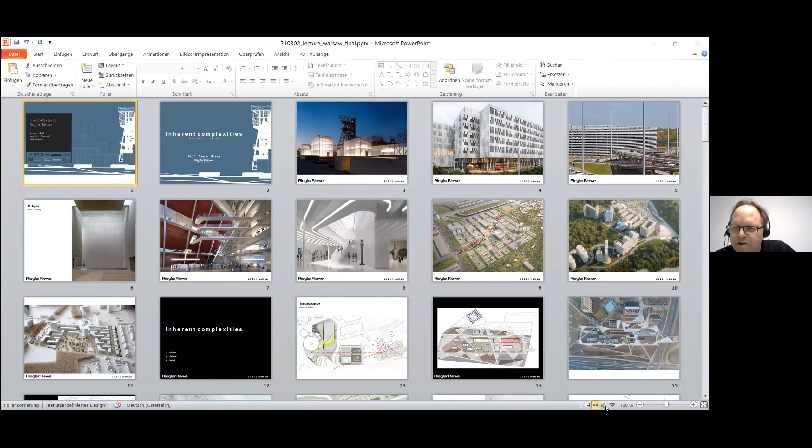Let me refer to your comment with the different hats I'm wearing. Actually, this has a certain background because due to my private situation, I got used to wearing these different hats because I'm German by birth, but I grew up in South Africa, so I'm German, South African, but also Austrian, always crossing the border. And since then, I'm always interested to see what is behind the border. So I'm never really satisfied with my situation where I am at the moment, but always, what are the others doing? What can I see? What can I learn? So different kinds of cultures, different languages.

I grew up trilingually. And with the language, you also get into the culture of other countries. You get to know how they're dealing with their everyday life. So it's always a kind of international approach, whereas I don't really put any stress on internationality because it is absolutely normal. It's just the usual way of working. So it's always the interest in the others, and also, as you said before, Victoria, of different materials, of different architectures, which arouses my curiosity. And then I try to cast this into architecture.

So with this lecture this evening, I would like to put forward a title, which is also the substantial content of this lecture, which I would call Inherent Complexities. Something which is like a bottom line in our architecture, especially if you see very different projects we've been working on, we have designed, we have done competition entries. Sometimes you might think, oh, but they look quite different. And where's the bottom line? So I would like to talk about this bottom line in terms of inherent complexities.

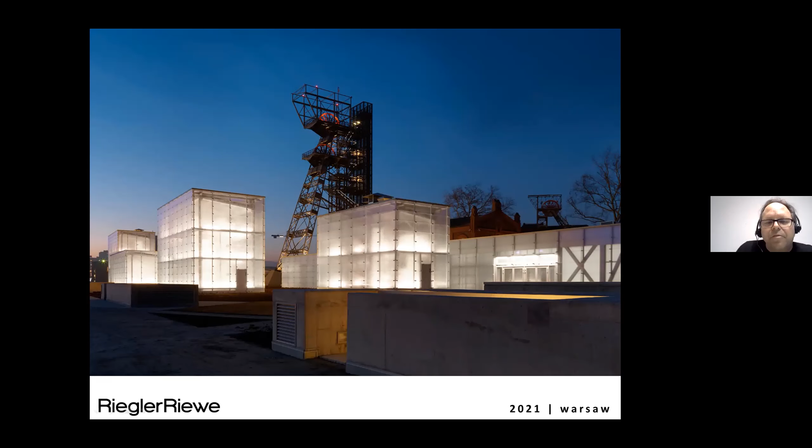So I would like to talk about a project you referred to already, which is the Silesian Museum in Katowice. A very prestigious big project, which was actually also nominated and shortlisted for the Mies van der Rohe Prize. I would like to talk about the new medical university we have designed and which is partly still under construction in Graz.

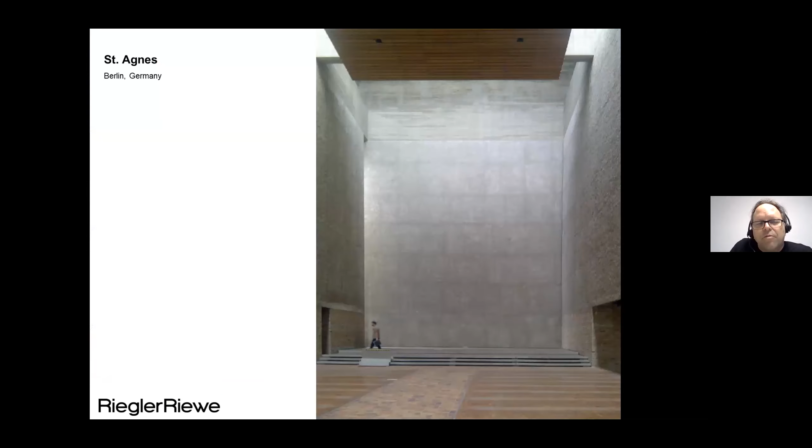I would like to talk about a huge car park for close to 3,000 cars located in the Hamburg airport area. I would like to talk to you about a gallery space or refurbishment of an existing church in Berlin, St. Agnes. I would like to talk to you about a huge event center, convention center for 20,000 people in Vienna.

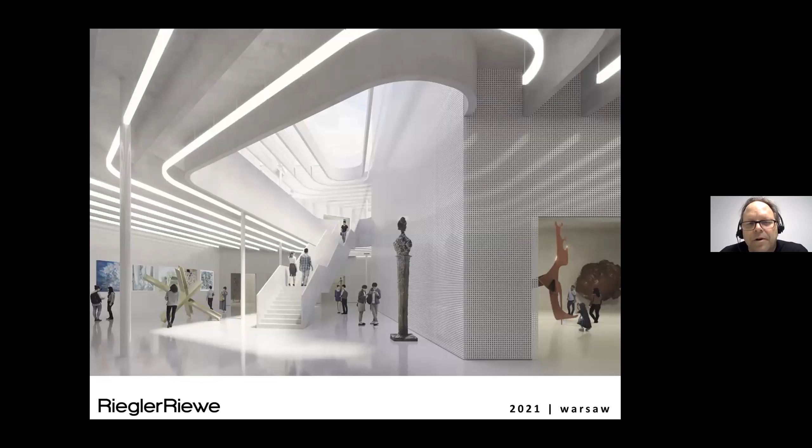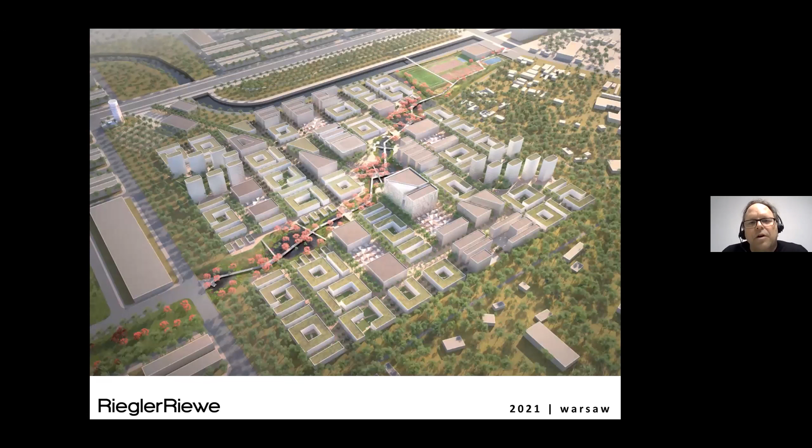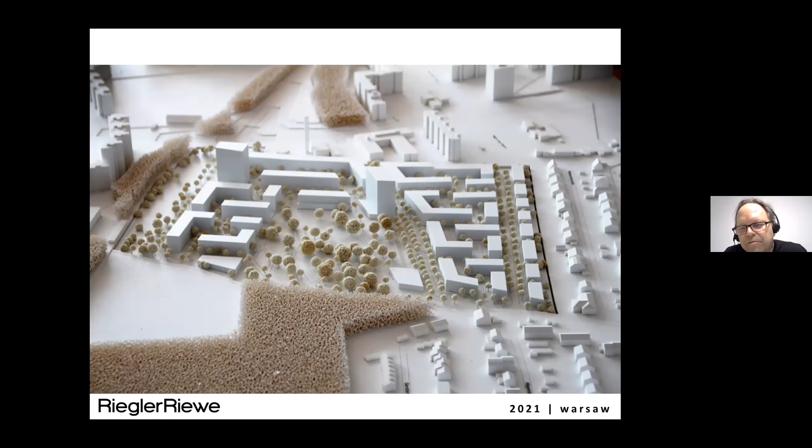I would like to show you and discuss a project in Seoul for a museum. And I would like to show you a project, the Vietnamese German University in Ho Chi Minh City, formerly Saigon, and a housing project in Seoul. And finally, also a housing project, a big urban development, which is in Germany.

Inherent complexities, something which actually goes by scale and which has different layers, but sometimes we cannot really divide these layers because everything goes like crisscross. But trying to focus on certain things, I would say there's something like an urban context, an object context, and a detail context in terms of inherent complexities.

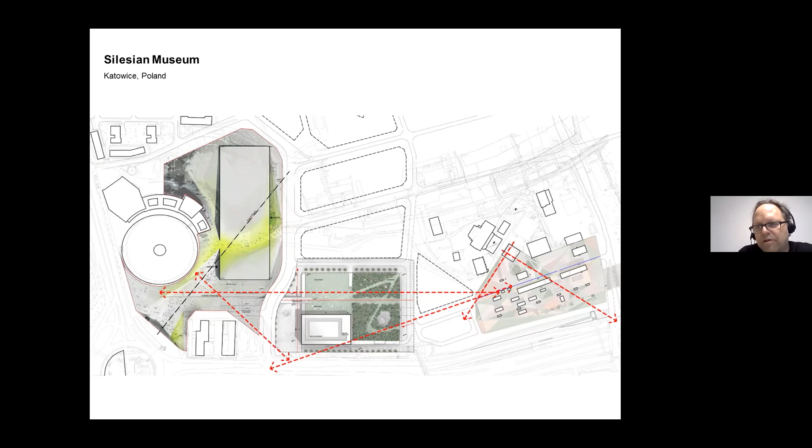So how to deal with this on a post-industrial site, which I think was highly interesting and caused our curiosity. So we said, let's give the city of Katowice not only a museum, but also public space, because we noticed this was at that time still kind of underdeveloped, and Katowice was striving to look for something new, trying to define a new center and things like that.

And so we said, okay, we'll use this possibility of connecting the park on this side with the Spodek on this side, opening it up and giving a park to the citizens of Katowice, giving them something as a present, which is unexpected, and contextualizing the museum with this site and with the urban setting.

At the same time, you notice with this idea, building a museum on the site would be counterproductive, because the museum would block off all these ideas and you could not walk from one side to the other. So we said the museum can only be something which is very small or hardly visible, something which, as we always like doing, does not look like a museum, causing some kind of irritation.

This was the design proposal, and finally in the built state, it looks just about the same. We were able to build exactly the things we were designing in the competition phase and implement them in a built, manifested way. On the right-hand side, you can see the bridge crossing the new road going into the existing park. And on the left-hand side, you continue to walk to the Spodek.

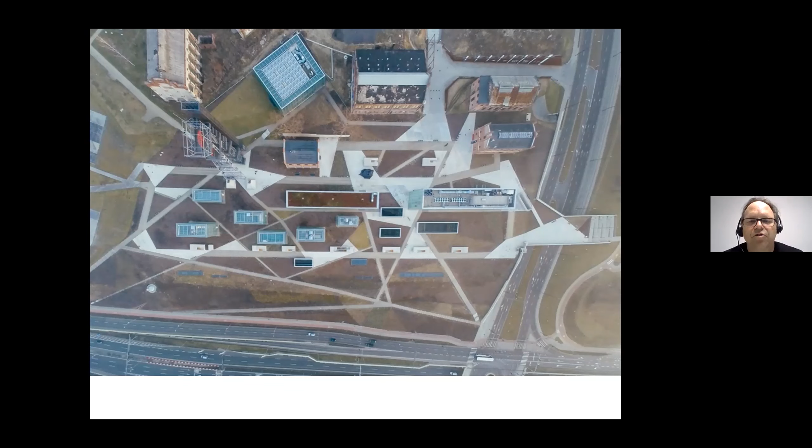In the above part, you can see the existing old buildings, protected buildings, which step by step will be changed into a cultural district. Another urban complexity, inherent complexities, an example is the Medical University in Graz. You see long bars, wider bars and narrower bars, buildings stretched out on this building site, which at first moment just do not look like a university building. What was actually the idea behind this?

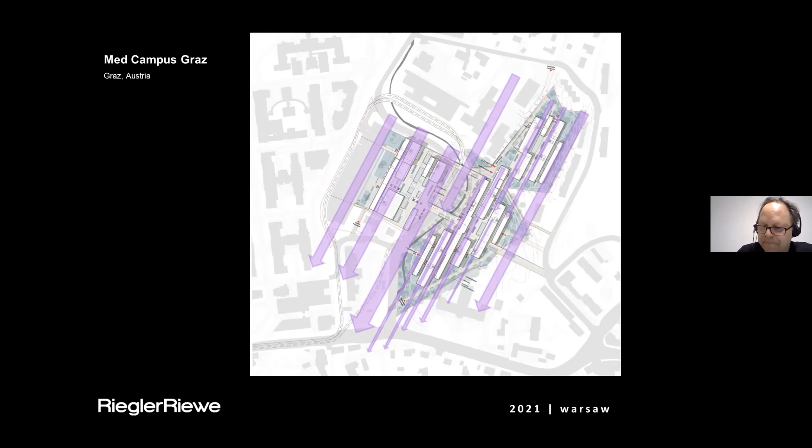And we developed buildings which do not look like laboratory buildings, which do not look like university buildings, but are derived from the idea of saving the microclimate and enabling ventilation through the whole campus area, which ended up with big volumes where the air can go through, and with buildings not wider than 14 meters; the narrow ones are 6 meters. Which we think is very important. And today, after the first phase has been finished, this obviously is quite successful, although we have not yet made any research on this case.

Now, Ho Chi Minh City is a tropical city, so it's very humid. It's not that hot, like 20 to 28 degrees, but the humidity is incredible. So you have to cope with that. And we said if we want to reduce the air conditioning, we have to enhance ventilation, especially cross ventilation. So we took the floor plan of the small city and turned it with our energy designers so that cross ventilation would be possible with the main wind direction, always having one side of the buildings with wind pressure and the other side with less pressure, so there would always be cross ventilation in every building.

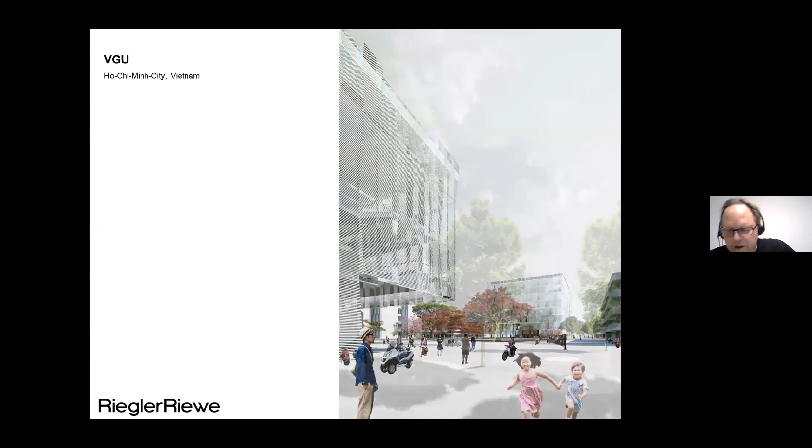But also the inherent complexities in terms of the urban context, again, of embedding a project, which we think is so important. It was like this car park in Hamburg. I showed a picture before.

Oops, sorry, I have to go back.

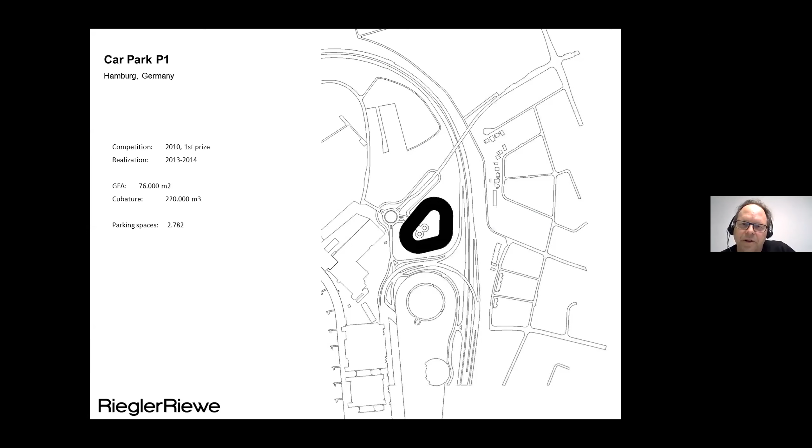Which is here, and actually bigger than the terminal building. There's a terminal 1, terminal 2, terminal 3 - this is the old terminal. So this building is actually bigger than any of these terminals. How to find a building which will be part of the whole airport area, but will not be stronger than anything - it'll just be one among other buildings. After completion, you see the terminal buildings in the background with the vaulted roofs, and the car park in the foreground, as if it has always been in this whole area before.

But it doesn't only mean it should be part of an urban realm. We also think sometimes it needs a special position, like the convention and event center in Vienna for 20,000 people, right next to one of the main highways leading around Vienna - from Salzburg, from Graz, Vienna to Budapest and Prague. So a lot of traffic, and these flyovers mean the highway is quite high. This is a site nobody actually wants because it's so hard to deal with. We said, no, it needs one big object, not what they were asking for, like 2 or 3 objects - one big object to find its position in this urban realm.

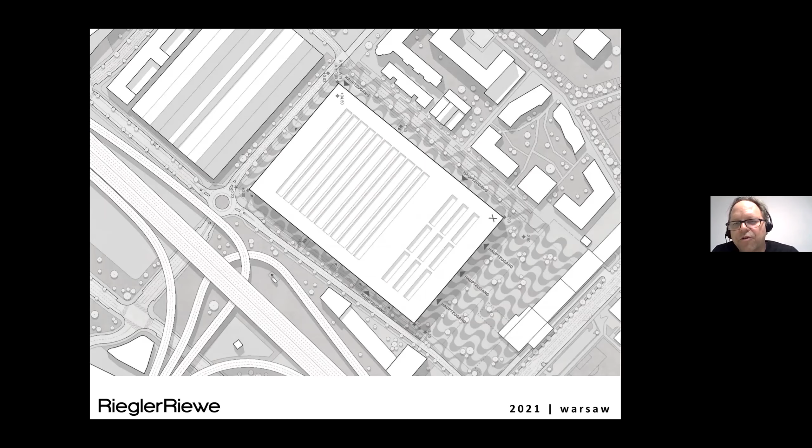As a design approach, we said it's for 20,000 people - an indoor stadium where Vienna wants to be part of the game of European convention centers like Madrid, London, Hamburg, Berlin, and so on. I think maybe there's one in Warsaw as well, I'm not sure. So they can host huge events like concerts, finals of ice hockey, basketball, or whatever. We said, okay, then they really have to dig into it. Of course it's not very cheap, but at least having this one big building already shows that something special on this site is happening.

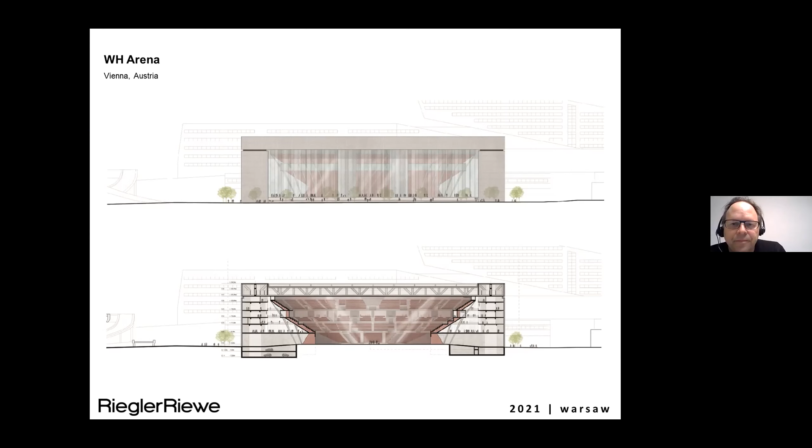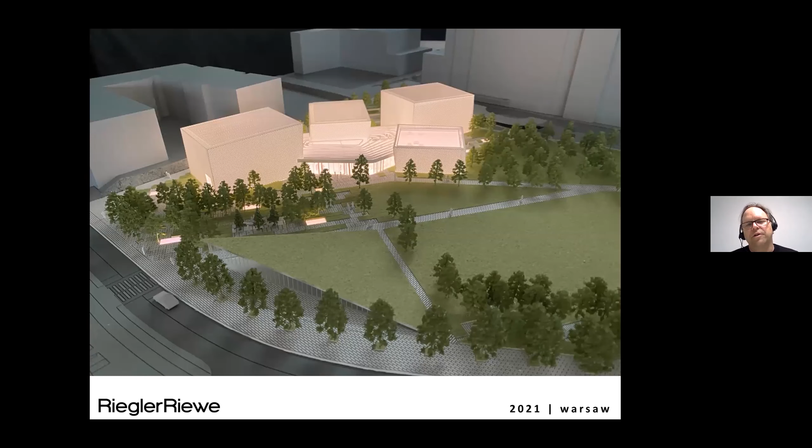How can you use it? How can you utilize the building itself? So it was also the idea to see the museum itself as part of the exhibition on show as well.

Staying in Korea, in Seoul we were invited for a housing competition with only about 5 weeks time, for thousands of apartments. They asked for an area you can see here with a certain urban fabric - very small houses in very bad shape. These are settlements in Korea set up from the late 50s, after the Korean War, for refugees who came and found a place to stay, who started squatting and afterward built their own houses. What we found is a situation where the quality of housing is really bad, but the social community is really strong - and how to deal with this was also an issue for the local municipality.

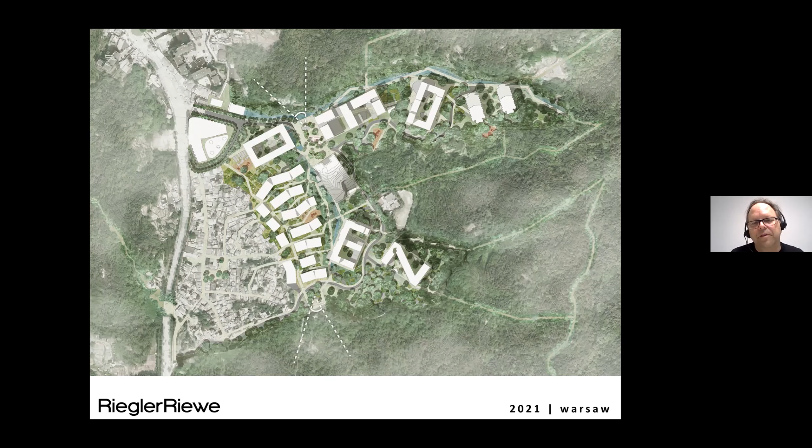So it's about history - the inherent complexity here is about history. What we said is that the plan of the existing settlement, which had to be demolished, would be inscribed in our plan here. You see all these small buildings in the landscape design itself, made by Agence Ter - all of this retracing the existing settlement structure which we have. So it's actually keeping with history. These people would have to move out, their houses would be destroyed, new ones built, and they would move into these new houses, plus thousands of new inhabitants. There would still be this idea of memory on this site.

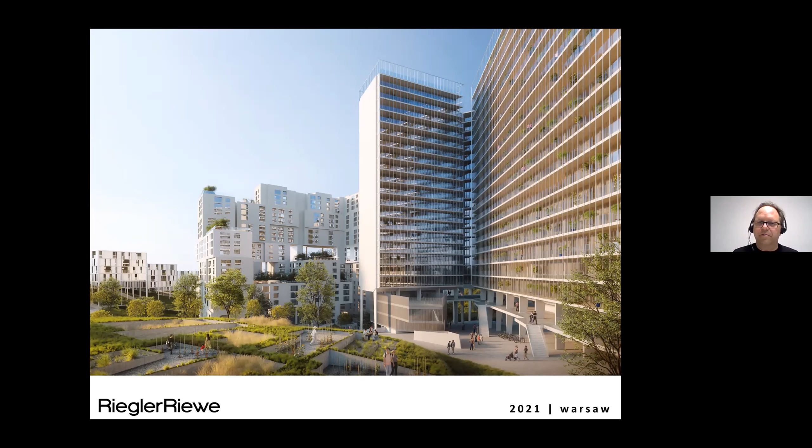Which you can see here on the left-hand side, where you see what looks like ruins. These are actually retracing the former houses on this site, but now they're vegetable gardens, community gardens, and so on. And the buildings themselves are all elevated.

Coming back to Europe, to Munich—a big project we're working on at the moment. It's 13 hectares and 1,400 apartments, maybe about 3,500 people who will be living here in the southeastern part of Munich, where the issue was the complexity of melting into the tissue of the urban fabric.

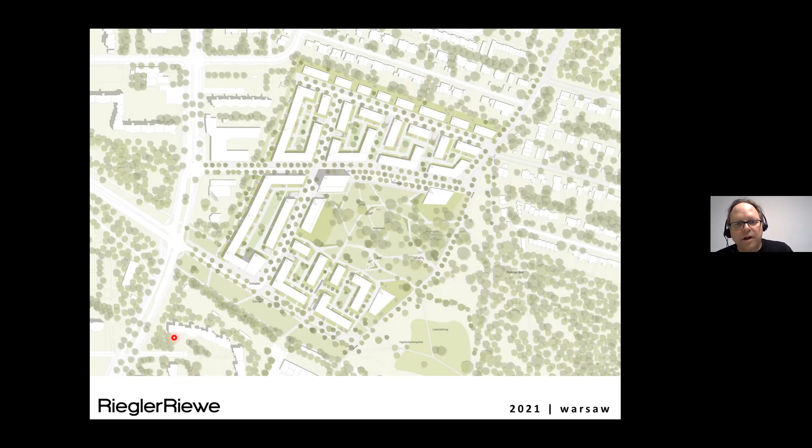At the same time, trying to find a missing link between the small residential houses and the semi-block structures on this side and the high rises—12 floors high, 14 floors high—and our buildings on this side.

Finally, when you come up and finish your plan, I'm always interested in drawing this in a Nolli plan, like we did here. I always think that the moment when you don't really see the new anymore, the project should basically already be quite good. So of course you know the project and you can find it—it's this part over here.

But you see that the small structure is part over here, the bigger structure is part over here, and the landscape part goes right into here. So actually it melts into the general urban fabric quite well.

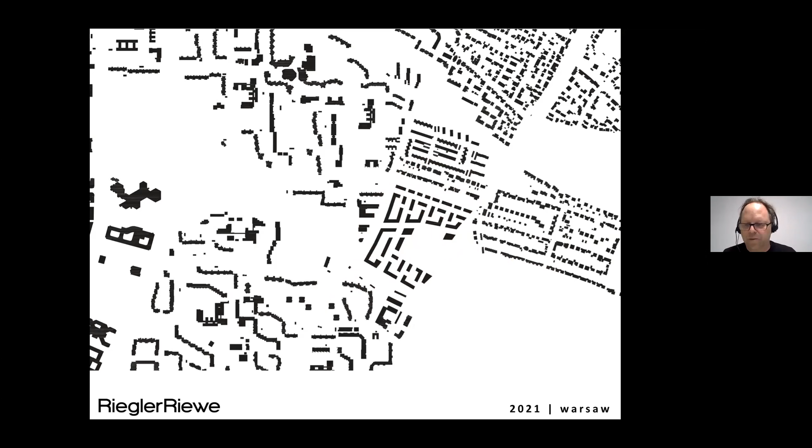Going into the next scale, you see the Nolli plan itself—just the buildings in black, which is of course a very strong abstraction of what a city is. It just shows the building and the space in between. But of course we know a city is something else and needs more.

But giving this kind of abstract position also shows us—with this image of Katowice—at a quick glance you can connect these cubes we have here with these buildings over here. All of this is the landscape in between. So you can read it in terms of a Nolli plan, and then start thinking how this whole area can develop on further levels, because only black and white is not enough.

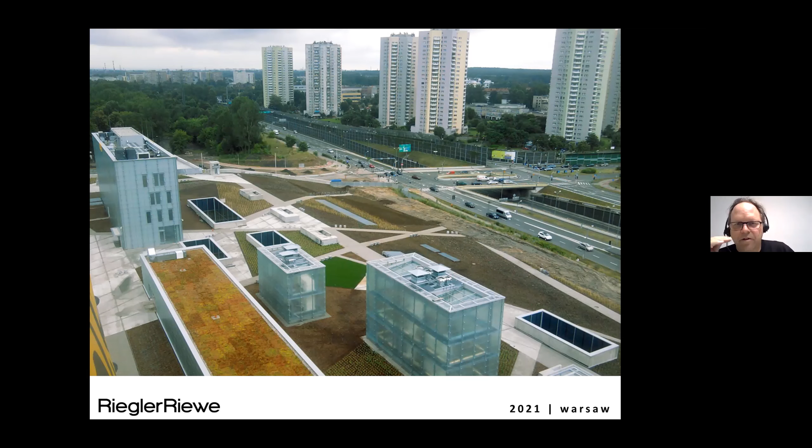So the interpretation we had for this site was—as you probably know, Katowice developed around 3 coal mines, and so there was always a lack of a center. The site given for the museum itself, the Silesian Museum, was also a former coal mine, the mine called Warszawa.

And it's not in use anymore. But what we thought was that there is an everyday culture in the city of Katowice, especially in Silesia, where a lot of working culture is underground. These are very specific people—we know them in Germany from the Ruhrgebiet—a very strong community, which exists due to having to work together underground in a very dangerous realm.

So we said, okay, we can change the paradigm—use it and change it, and say now, instead of working underground, we put the culture underground. We dared to propose this because people have a positive connotation with what is underground. In other areas where there are no mines, the underground is something dark, dirty, wet. But if there is a working realm underground, it is something positive—it's hard work, but it's labor, it gives money, and you can afford a living.

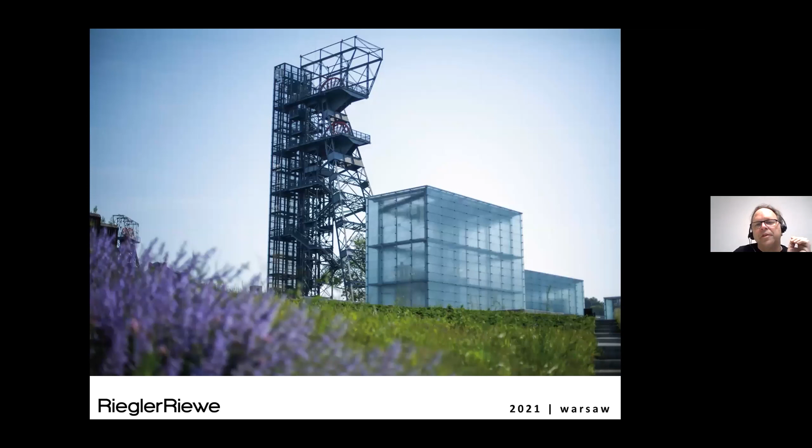So you can actually say, okay, these cubes can become abstract because they don't have to be a museum — they just have to fulfill the function of ventilation, smoke fumes, and getting daylight below. This is the thing where we enjoy this irritation, because there's no sign saying this is the Silesian Museum, so you'd have to find out, be curious, what is actually happening here. This can be just something, but at least not a museum — can't imagine this to be a museum.

This was the initial model we did for the competition — this was the model in the office. We only had these cubes, and we said, yep, we don't actually need more. The whole museum, all the exhibition space, everything is underground, and we'll give a park as a present to the citizens of Katowice. So it's just one very strong, daring approach of how to see a museum.

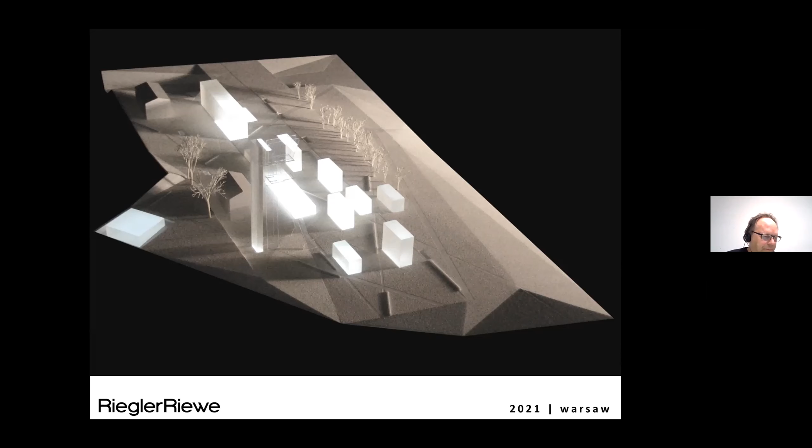Coming back to the idea of these cubes — that's the medical university in Graz, where we explained the idea of checking the cross ventilation, letting the natural airflow go through these buildings. So all of this is the new university.

And this is actually just for bachelor students, so we don't have any patients here — the students are just trained in laboratories. Finally, when you're a master student, you go to the hospital area and are also trained with patients. So in this building we have a lot of laboratories, lecture halls, seminar rooms, and of course offices, institutes, and a huge area for research.

This university was founded in Austria in 2003 — there was a reorganization of all universities in Austria, and we were kind of privatized. All of a sudden, as a coup d'etat, there were 3 new medical universities, and this is actually the first medical university which was built new. In 2003 the planning began, conceptual planning for a new university, and the first phase was completed about 2 years ago.

So there are students in here already — not now, because of Corona. In this short span of developing a new medical university, this university has been ranked as one of the 10 best universities worldwide founded in the last 10 years. So it's incredible, the approach they actually made, and it's also a lot of enjoyment and fun talking to these researchers and highly intelligent people about developing a campus like this.

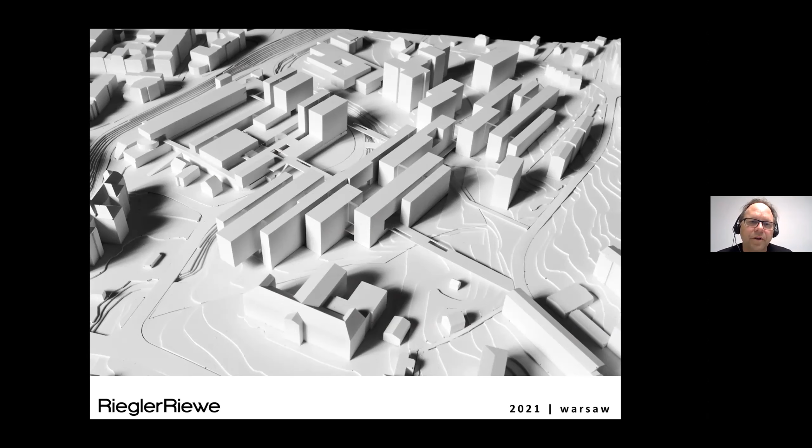But then there are also certain points I'd like to show, about how to develop these cubes in further detail. This is the point I just showed with the elevated building itself — so we've got these cubes, this is the 6-meter cube aligning next to the 14-meter cube, and a big public space at ground floor level. And of course, when designing a cube like this, we would like to enhance it as well.

So actually we were fascinated that our engineer said, okay, we'll try to make it work — because still it shouldn't fall over. And it has become something like an icon in this area, because everybody's talking about these very strange columns, as they call them, spaghetti columns, in this university campus.

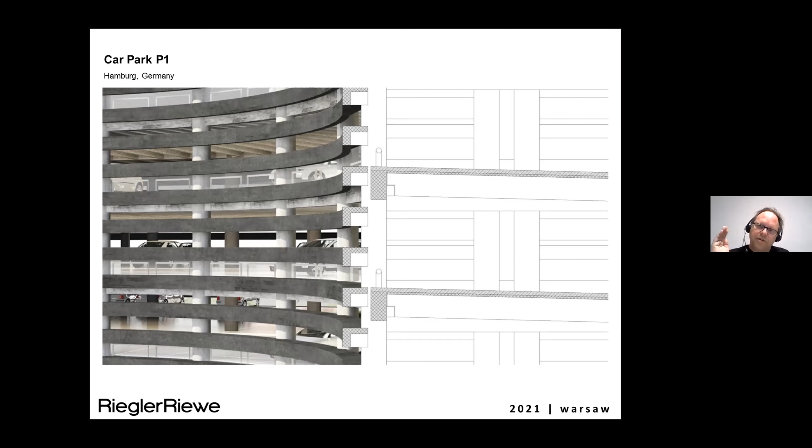So this was an initial concept for the facade, saying the facade itself has to be as curved as the building itself in its floor plan, and it has to have a substance as well. At the same time, there should be an open car park. So 50% of the facade has to be open for cross ventilation, so you don't need any mechanical ventilation in the building. So this was something we proposed, and had, of course, to try to convince the owner of this car park that this is a good idea, where it is actually looking far more expensive than the usual car park.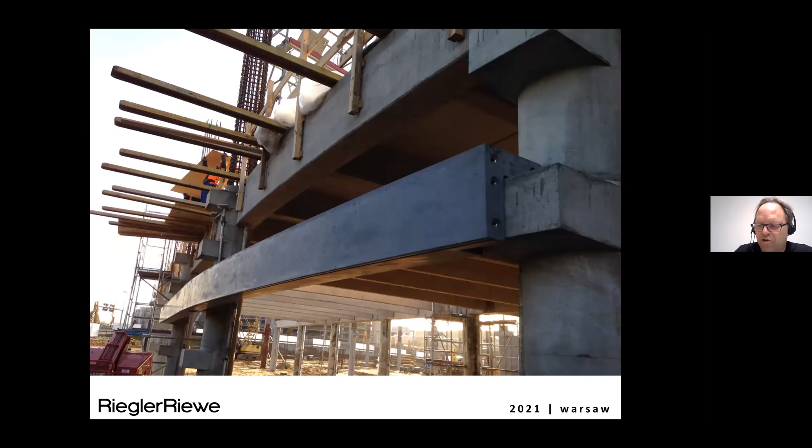We were able to convince the client of having these curved prefab elements, altogether 11 kilometers, 11,000 meters of prefab elements on this facade, to give it this very special appearance. They went with it. To then see a building like this, because if you imagine this with straight pieces of concrete, this would not look that good.

Coming to the church, or the former church of St. Agnes in Berlin, now known as the König Gallery. After the fall of the wall in Germany, a few years later, about 100 churches were for sale, so you could buy a church. And this is actually what the owner, Mr. König, did. He bought a church, a kind of brutalist church, a fantastic building, which is listed. It's a historical monument built in the 70s.

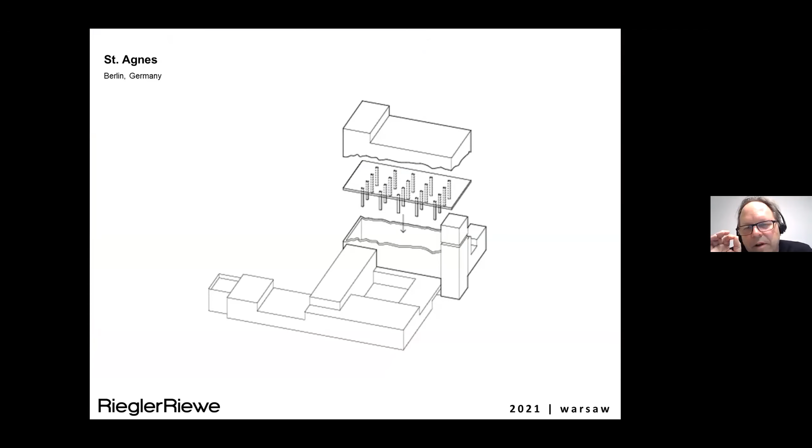And the brief asked that we double the floor area so there would be enough exhibition space in this church. How to go about this when you already got used to this fantastic space and now you have to change it? So we said we would only take one measure. To double the surface area inside would mean to put in one floor, and this is put in like a table, just an ordinary table with legs. And this would be the new floor inside this church.

And this we put forward to negotiate with the local departments, because the building is listed. It was not very easy, and long discussions faced us. So we put the table into this church here. You see this line along here.

This is a balcony, which you could see in the slide before, for the choir and the organ. And we had to keep this balustrade because it is needed structurally. So we had to be on top of this. This gave us the new height to actually take the table along here.

And this is the area of the altar with the skylight over here. So the light would come in here. So we didn't change anything of the ceiling. Just put in this table with the legs. That's all. Appears to be quite simple.

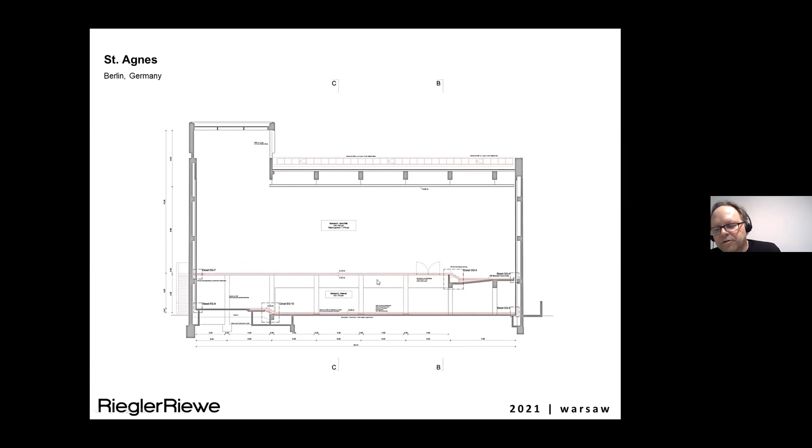Due to the fact that the building is listed, we were not allowed to make any foundations, because they said maybe in a few years' time this will not be a gallery anymore, and you have to take out everything and make it be a church again. So this is the way we actually then made the non-existing foundations, and they said, okay, we actually wanted to make a table, so a table doesn't have any foundations, completely clear. So we could actually focus on that and articulate the idea of a table.

And at the same time, also going with the idea of the table, was the thing that actually the side walls, the concrete walls, are not load bearing. So we could not attach the new slab we would put into the walls because of them not being load bearing. So all the weight is on the load bearing columns, say on the legs of the table.

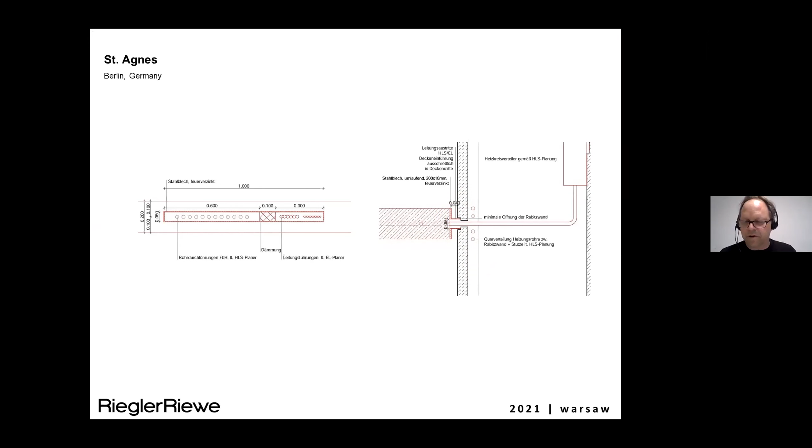So there's a joint between the plaster wall, which you see here, and this is the table itself over here, which is 20 centimeters, and everything we need for technical appliances is in this concrete slab, a monolithic concrete slab of 20 centimeters only. So that's why you can see along here a joint going with the facade, with the plaster wall. So all of these walls are not load bearing, which is actually surprising. And what we put in is a concrete floor, as I said, monolithic.

And we were actually asked to do this in steel. So you could see the difference in an existing historical monument. And we said, well, this is the Charter of Venice. We know that you have to go like this in your planning process, but we think that this church itself is so strong.

It's by Werner Duttmann, a good architect. I think it's his strongest project, and he then became head of the urban planning department of West Berlin at that time, and we cannot do any better. So we'll try to make it look as if it has always been there, and only the details are different. And this was a very kind of intellectual talk we had with these departments protecting this church, and it was really fun in the end that we actually could convince them of the ideas we had.

So we've got this joint, and we've got this table made out of concrete. And the joint, we then notice, because the walls are not load bearing, the topic of the joint is all over. There's also a joint here. All of a sudden you notice, okay, Duttmann also wanted to show that actually these walls are not really concrete, it's just plaster, like a false wall. And so we've got the joints along here, and we've got the joints along here. So all of this building actually consists of joints, which you then finally see in this section.

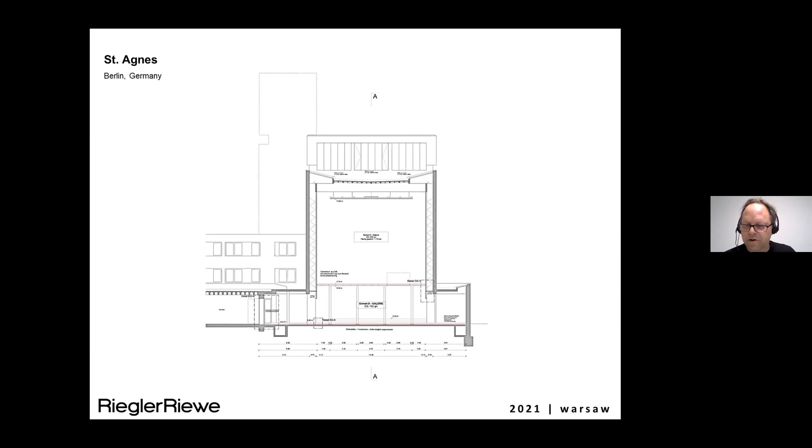And when you are in the space on ground floor below the table, a space which actually should be used as a depot and storage for artwork, but has not been used like this till now, you look up and you see the joint again. So at this moment, you actually become sensibilized for the joint as a topic in this building.

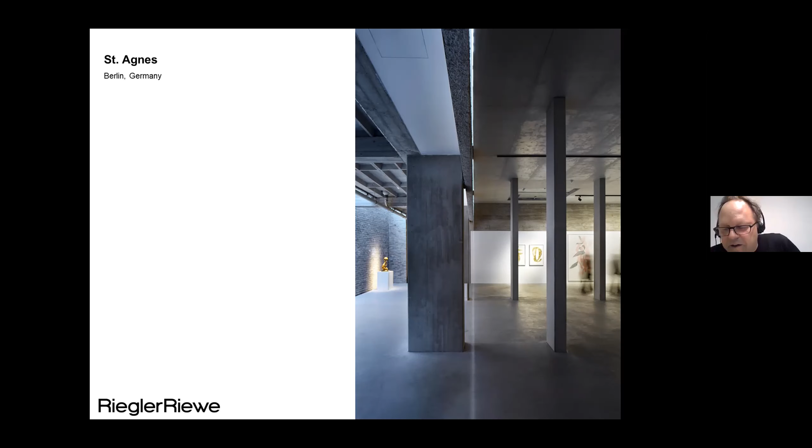And it's not only that you see that there's actually a detachment of the concrete slab in the existing building, but also there's an acoustic connection. You can hear the people from above when somebody's talking upstairs or when somebody's talking downstairs. It stays actually one space, which is rather fascinating, something we didn't actually think of and imagine when we were designing this intervention.

We then had to add an emergency staircase on the outside. And again, we said, okay, in our whole building, nothing is attached to the concrete wall or to the fake walls. So also the staircase itself should not be attached to the existing. And we have to go up to the first floor. So we designed a staircase, which is just one huge cantilever. So there's no column and no attachment to the facade. So there's a huge foundation below this structure.

And as you can see in this part here, the ground plate is actually thicker, and then it goes up here and becomes a cantilever here, and the whole balustrade itself is part of the beam as well. This is something we were able to do because we've got a fantastic client who really enjoys these intellectual discussions.

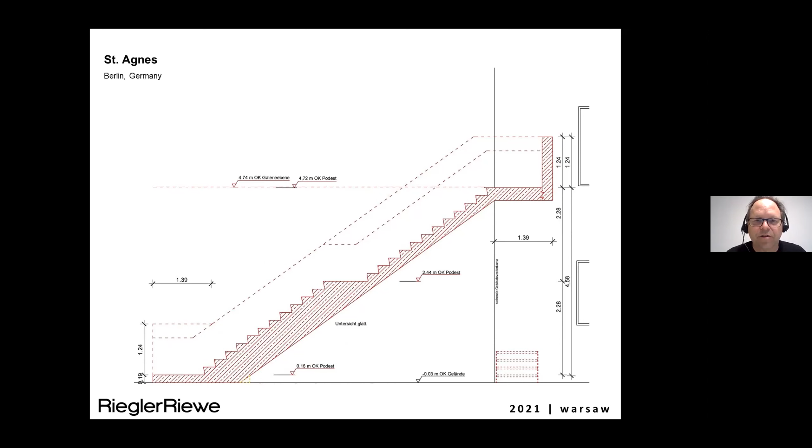So you see the staircase here as if it has always been there. Just like the table inside, also this concrete staircase looks as if it has always been in this place. And you can see the joint along the facade. It is detached. It's just one big cantilever going around the building. And the balustrade itself is, of course, part of the cantilever, so it's the beam. Otherwise, it would just not work.

If you have a closer look, you say, well, this is an ordinary concrete work cast in situ. The formwork is actually very clear and very precise. You see all the edges are 90 degrees. And this is something which actually makes the difference to the existing building of Werner Düttmann, who treated his concrete surfaces in a different way.

Like, for example, in the bell tower, which is also the main access to the upper floor, you see the concrete work with rough shuttering, and you see the edges are 45 degrees. And this is the way he would treat it. So all the new concrete work is actually a very precise formwork, very smooth, and always 90-degree edges.

And then we said we also would like to take the handrail, because it's great, it's fun, because you can't actually do these nowadays anymore, because these handrails always have to be a rod, it has to be round, but this is a square. And we used it for the staircase outside. You see on the right-hand side. So this is actually a Düttmann handrail, but with new concrete work. So the concrete itself is always 90 degrees, very sharp, very clear and clean formwork.

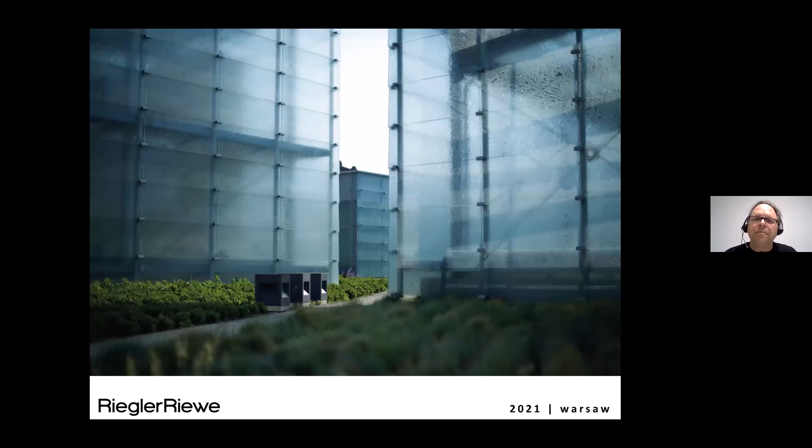saying that you can actually use these huge surfaces by putting in a new kind of vegetation which is local at the same time. And the organization of cubes, of course, is dependent on what is actually below, which parts of the building need the daylight and where, but also at the same time you start making something like an urban morphology in the landscape you are designing, which is highly fascinating. It's a play of perspective, play of letting roads go, paths go through them, and also a play of scale, because it's hard to figure out in which scale we are working in at the moment.

This takes me back to the university project, the medical university project, with kind of the same idea, but not working with the translucency, but with the abstractness and the idea of perspective, of creating space. Those who have been designing laboratory buildings know that there's actually a kind of grammar behind them, that due to the space in the laboratories you've always got like a grid or raster of 1 meter 15 or 1 meter 20. And we used 1 meter 15 here. And all the elements you see here are like parts of 1 meter 15. So it's not only the interior, but also the exterior. Everything goes along and everything coincides.

And then to make a big building small, again, this idea of Katowice in a certain way as well. Here we said very often the sky in Austria is not blue. It's maybe gray or cloudy. And so we took up pictures of clouds and pixeled them, and used 6 colors, 6 shades of gray for this facade. And we wrote our own program for this, of actually having the facades be something like pixeled pictures of clouds. So with the background, it actually melts with the background, as you see it here.

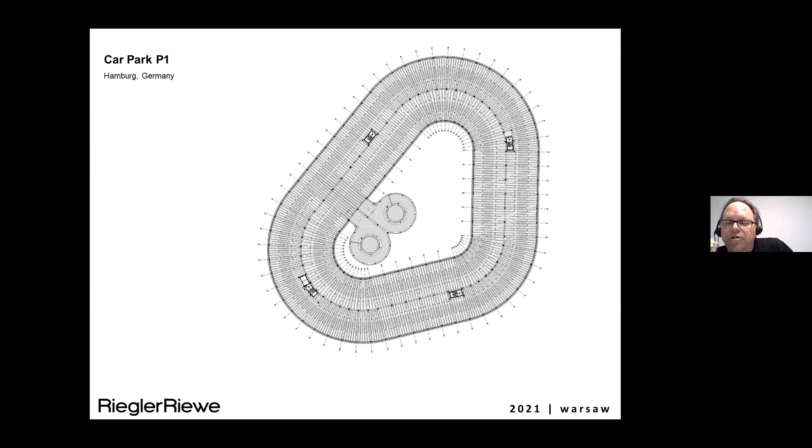And then of course the straight pieces are the same on 3 sides. So we've got a huge amount of same prefab elements in this building. So we could actually convince the client this is not more expensive than an ordinary car park in, say, rectangular shape.

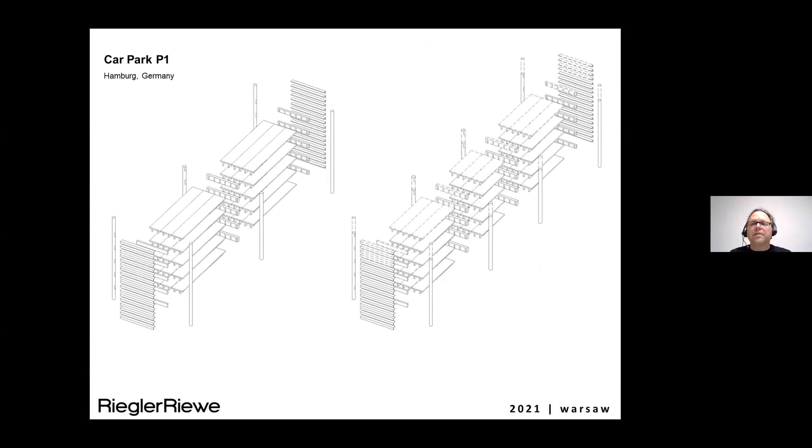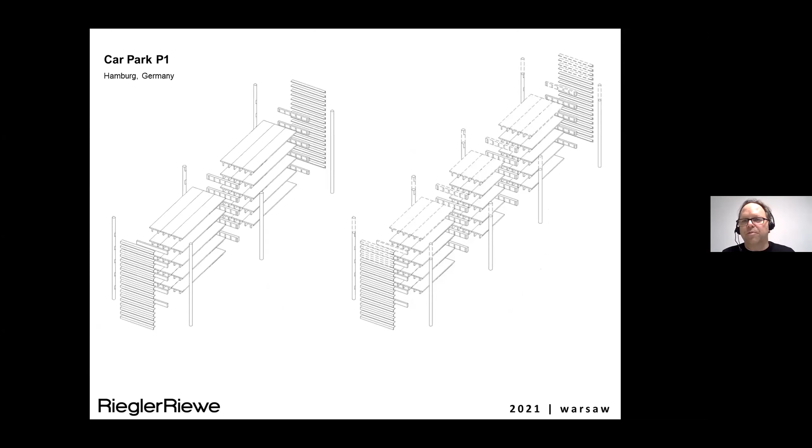But then the client came along and said, can't we do it even cheaper? For example, instead of just having 3 columns, why can't we have 4 columns? Because then the span of the slabs would be less, and the dimension of concrete would be less, so the use of concrete would be decreased, which is right, and having less concrete in a building means it would be even cheaper.

But then we said there's a problem coming along. In our proposal with 3 columns, one in the middle, we are actually quite free in parking in these curves — you see the car here is not always opposite another car on the other side. The moment we have two columns here, we can only park between the columns.

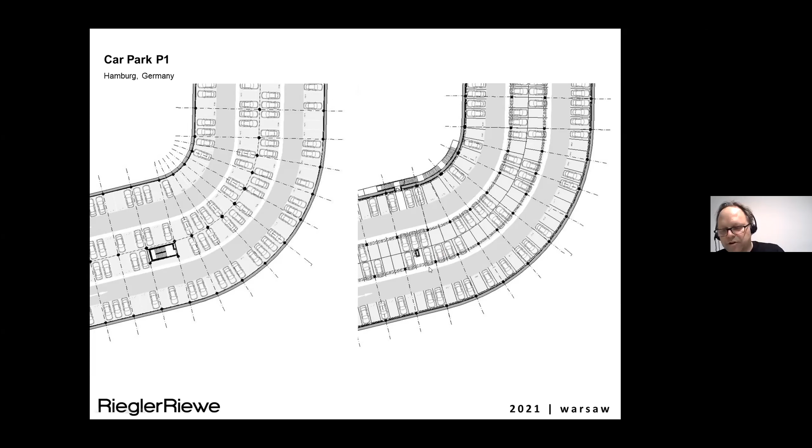So this is actually a problem coming up. In our calculation, if there are just 3 columns, we get 494 car parks per floor, and if there are 4 columns, 473. So finally we as architects said our project is more efficient because more cars can park here. Finally the client said, well, you're right.

If you calculate assuming the car park is filled 100% every day, 24 hours, but they assume their car park is filled 75% on average over 24 hours, the car park is never full. So the right side is actually more efficient. Something very fascinating for us as architects — we said okay, you win, let's do it like that.

So the construction was made in that way, and it was even cheaper. Showing it from the inside, maybe you don't even notice the difference that we now have 4 columns instead of 3, because the span itself is quite huge in any case.

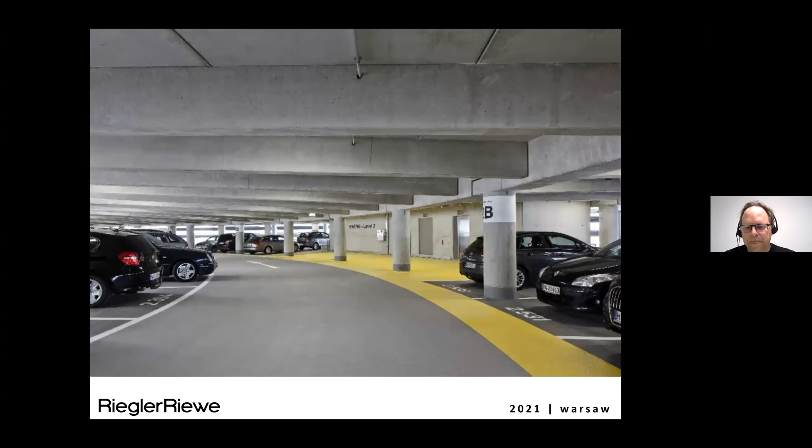And the second challenge we were given by the client was that they did not want any joints, because joints always have to be maintained, and there are many kilometers of joints in the building. So they wanted us to cast the concrete slab in one piece — 12,000 square meters of solid concrete without any joint. This is technically possible, but as I show in this image...

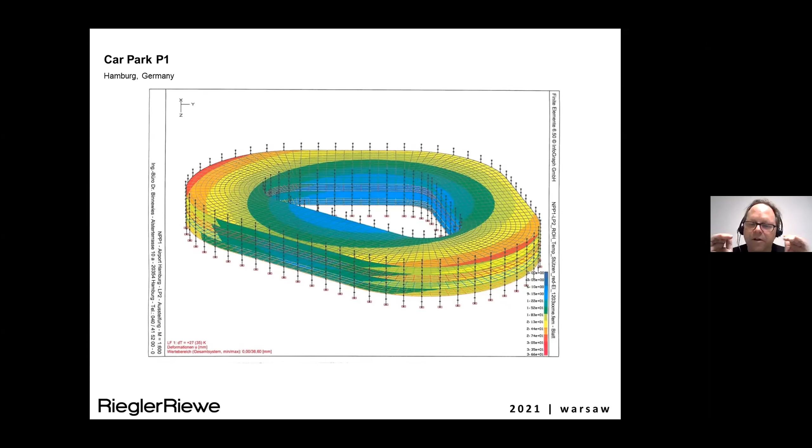...there are constraints coming up, because this whole building starts to move and reshape itself due to thermal influences. When it's cold, when there's sun on it, maybe even wind, this whole concrete slab starts moving. So actually the whole building had to be redesigned due to the fact that it is moving all the time — which led to one of these, for myself, fascinating details.

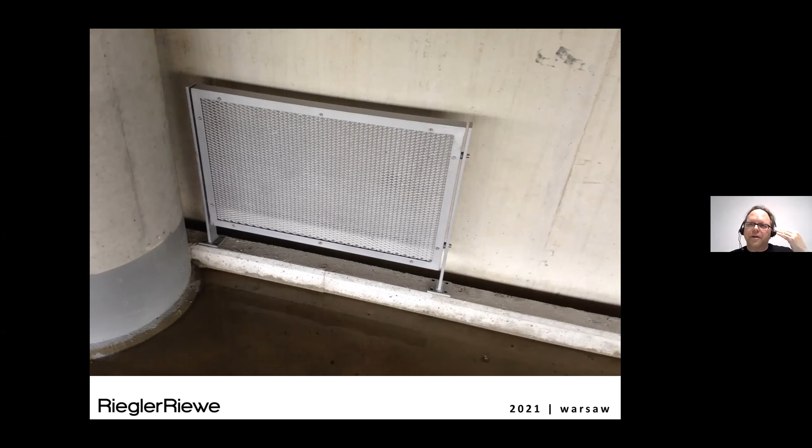At the same time, we have to put up a balustrade, because the moment the building contracts and we've got a joint of 16 centimeters, something can fall in — your dog, your suitcase, whatever — it can fall into this joint. So it's highly interesting, this complexity of a structural approach to a client's claim, and then you as an architect still have to solve this problem.

And finally you see this building like a very abstract, big structure, actually moving away from being a building and becoming more like a structure, where you don't notice all these challenges inside — which we as architects in our office find highly interesting to work on.

So it's always about certain measures we put into these buildings. We have a team, and we talk about these things in the team, and suddenly everybody says yes, okay, let's have it, let's take it.

So in this design proposal for the event arena in Vienna for 20,000 people, we had a case study given, which was this one here: you've got the arena itself for 20,000 people with all secondary functions aligning it like this, and when you're inside you go through this building and you're outside. We said, well, this is not really that interesting.

So what we proposed was to take this aligning building and just place it like two longitudinal slabs at the sides of the arena, creating a huge interior space. Then dislocating parts of these longitudinal buildings and having these columns, and finally putting the roof onto the arena itself.

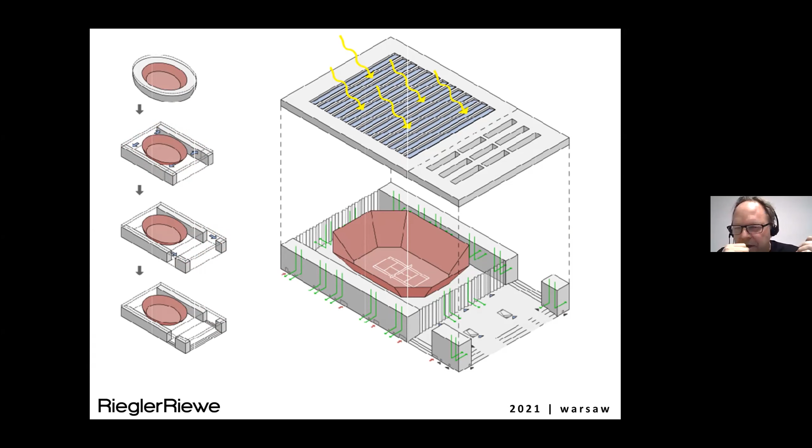So we are creating a vast interior space. We said yes, we can do so, because it's not only that spectators visit, say, a concert or a basketball match, but also at the same time you can use the interior space as a catwalk for people who like to be seen, who want to show off. Lots of things happen there before you've got the event of maybe just 90 minutes. So everything was proposed to work in this way.

And so the facade itself on this side was developed like a big curtain. This is where the curtain opens. Of course it doesn't open in real life, it's glass, but made like a huge curtain. And all of this is then the stage. It's not only inside here, all of the building becomes stage itself.

So this is the interior space, with the left-hand side the arena, where you can actually go in. You've got the VIP part over here with certain units. You've got all the restaurants and bars on this side, and you can come up here with huge escalators, pairs of escalators, walk around here, and then go into the arena itself. And you've got this big mutual space for the audience.

At the same time, the roof itself has got this vast span, so the structure of the construction is very high. What we proposed is that part of our program, the technical facilities like HVAC, solar collectors, PV elements, can be in the roof. But all of this over here is actually the hotel they asked for. There's a big hotel, like always 2-floor buildings up here, a hotel inside the roof for the arena.

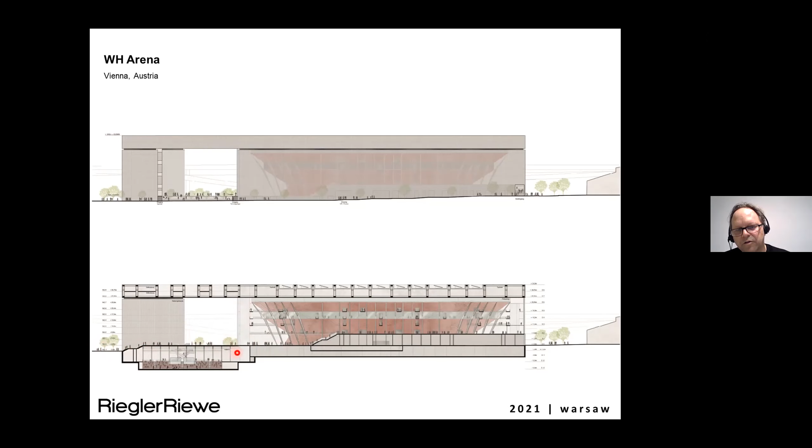And below there's still a triple sports hall underground. This is the main entrance area for people to go in, where the glass curtain is, and you go in here and into the arena. This gives the impression from the outside of this vast building, where in the roof itself you now notice it's not just a roof.

This roof is loaded with utilization. It's the hotel up there, and in the big columns we've got offices, service and administration for the arena itself. And then this vast space in front, as a kind of covered space, is like the public space going indoors but not indoors yet. Then you've got the big glass curtain, and finally you go right into the arena space itself. So it's not only for looking at the people playing the basketball match, but also the excitement of being in this place, which we thought was so important in creating an arena of this dimension in a European network.

And with the museum itself in Seoul, we said, can we contextualize this building, or the brief itself? We said it's more like an urban living room, right?

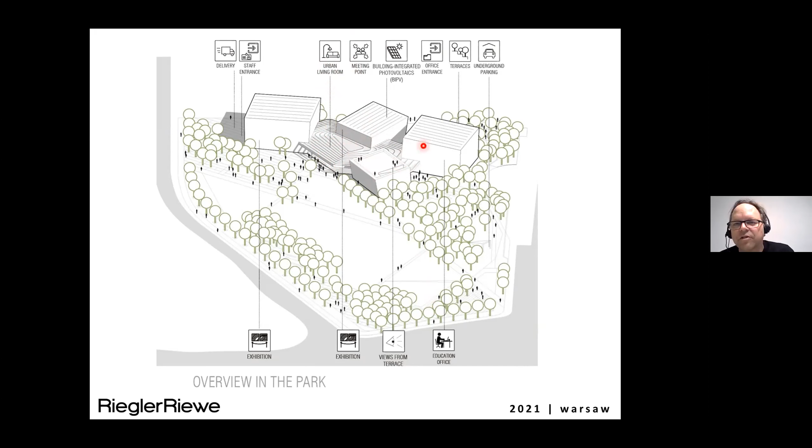So all of this is actually designed as an urban living room, and only the rest, so to say, is the exhibition space itself. It's the public area, the semi-public area between these cubes, which we thought was far more important than the cubes themselves, which can be very abstract.

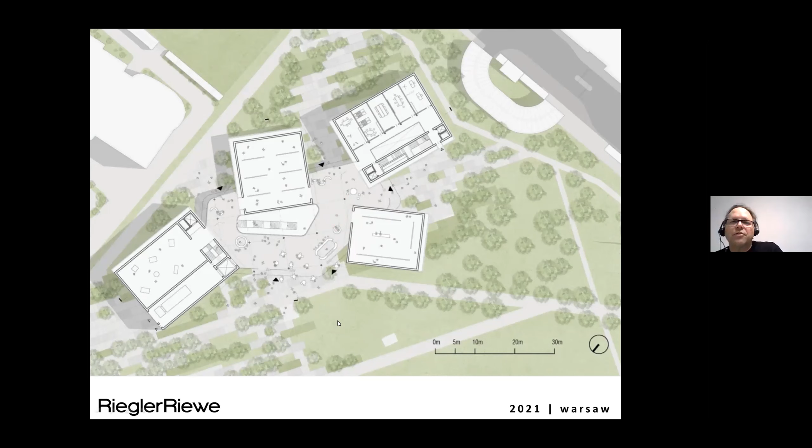So you can actually walk through this museum, have some coffee, enjoy your day without visiting any exhibition, without having to pay. This was the idea that took us through the whole project: you've got more or less this cafe lounge area for the whole neighborhood, and if you're really interested or curious, you can go into these cubes and find out what's been exhibited.

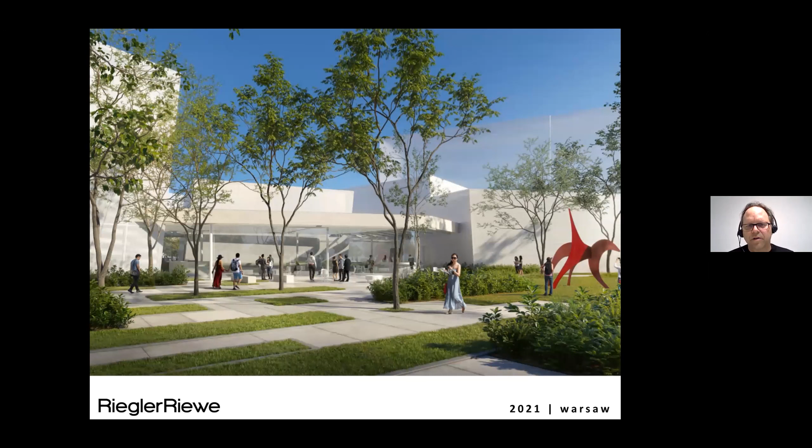And when you go to the outside, you notice it doesn't really look like a museum. Maybe it's more like a restaurant, or, well, you don't know what. There's a piece of art still in the garden, but it's again this phase of irritation. We say this is interesting for the people who really like to find out what is actually going on inside.

Coming back to the VGU, the Vietnamese German University, where I told you that we actually turned this plan into the wind so that we would have strong cross ventilation with pressurized and sub-pressurized facades. In the organization itself, this part here has mainly faculty buildings. Here we've got faculty buildings, and these are dormitories. All the fat ones are faculty buildings, the rest are dormitories, and professors and teaching staff are in these small houses here.

What we have here is a ravine leading through the area, which only fills up with water during torrential rainfalls. As a form of organization, there's a boardwalk going through this whole area, giving a form of orientation. So what we have in the middle is no square, but an area of water or swamps. It looks as if it would be the center, but it's not the center. It looks as if it would be a square, but it's not a square.

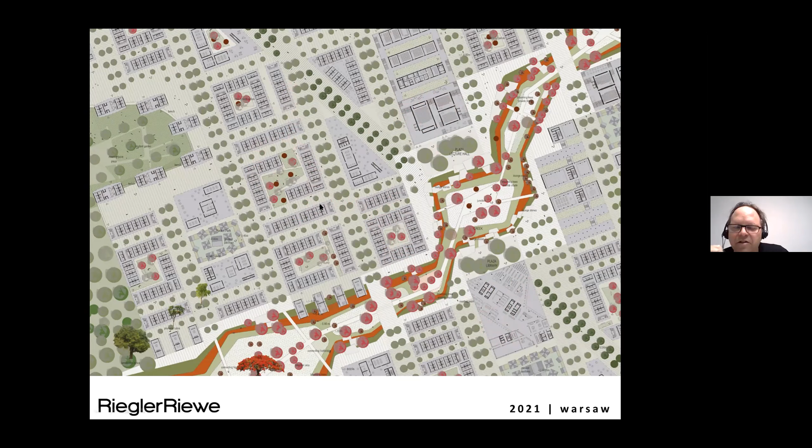Going into detail, you can see that this is the square itself, which is the ravine. Finally, it's just landscape. Next to it we've got the faculty buildings and the housing. These are faculty buildings, lecture auditoriums, this is the library, and all these with this floor plan are the dormitories for students living on campus. I'd like to focus a little on the energy design for the dormitories, which fit into this whole system.

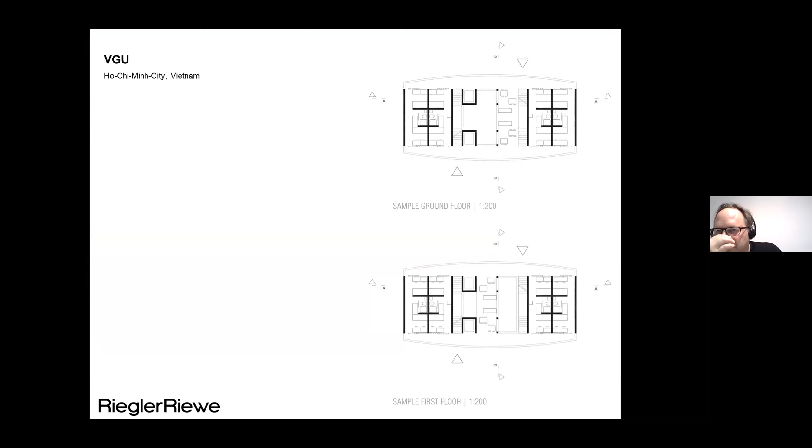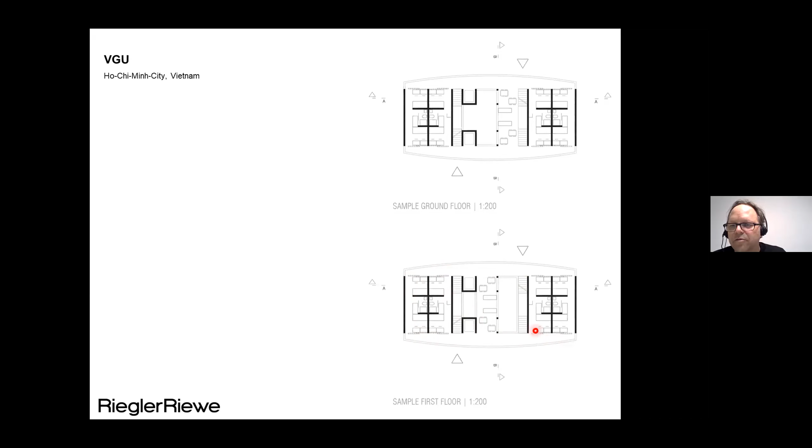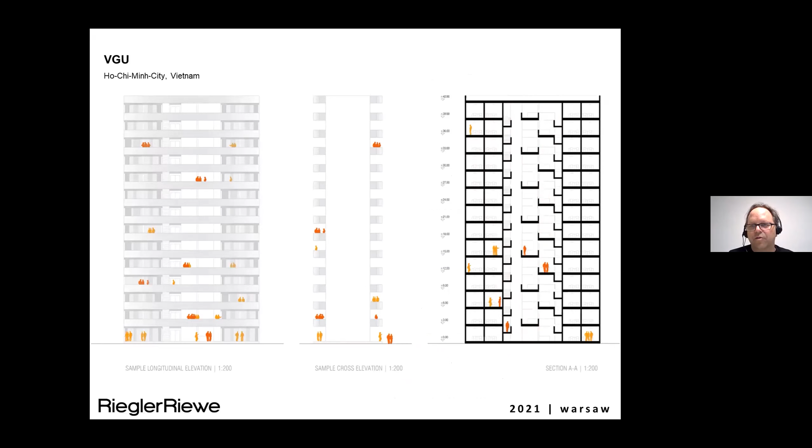This leads right up to the idea of having this also in the high-rise dormitories for students, which you see here as an example. The dormitory itself and the kitchen area are on this side, and the access balcony is on this side, so everything is outside. Only the dormitory itself is inside. There's a possibility that air can flow through here, which you can see in this section — everything is completely open and only that part is closed, so we can do without air conditioning or mechanical ventilation in these buildings.

Finally, you see these buildings on the left-hand side and right-hand side for this project itself. Again, we're playing with having very small privatized areas, but the rest is always semi-public and public, for most different possibilities of utilization by users we don't know — we don't know what they would be doing there. So it's completely open.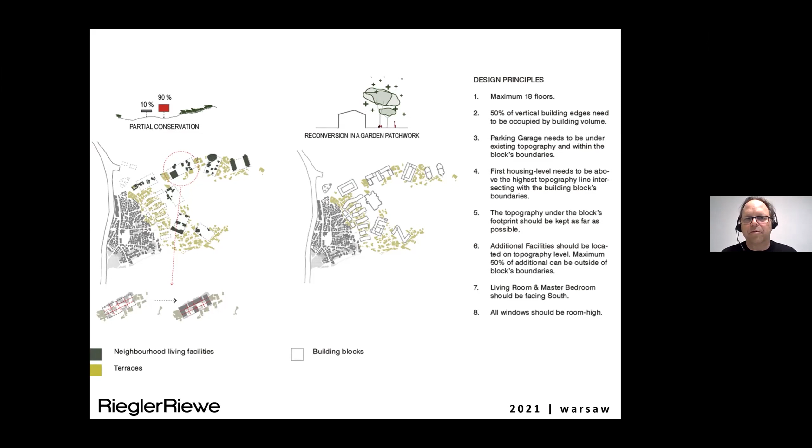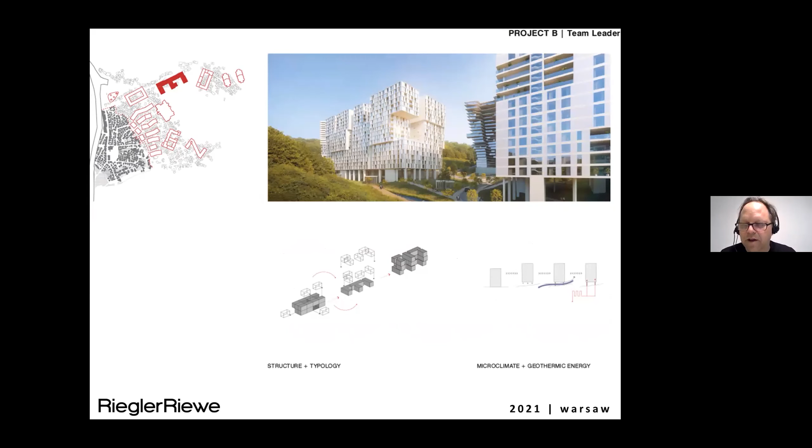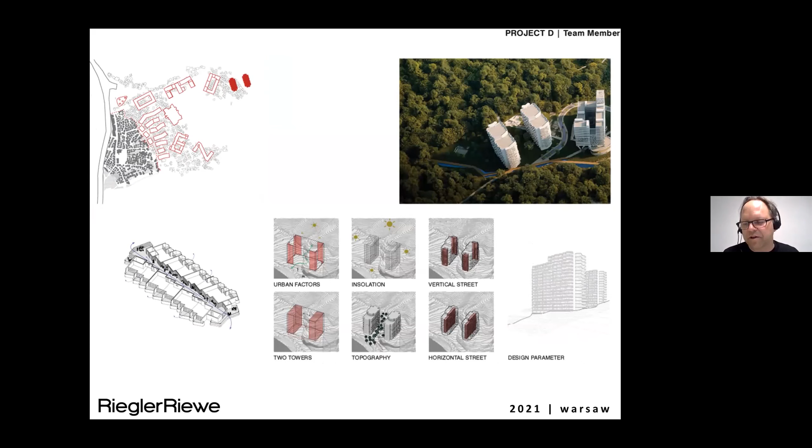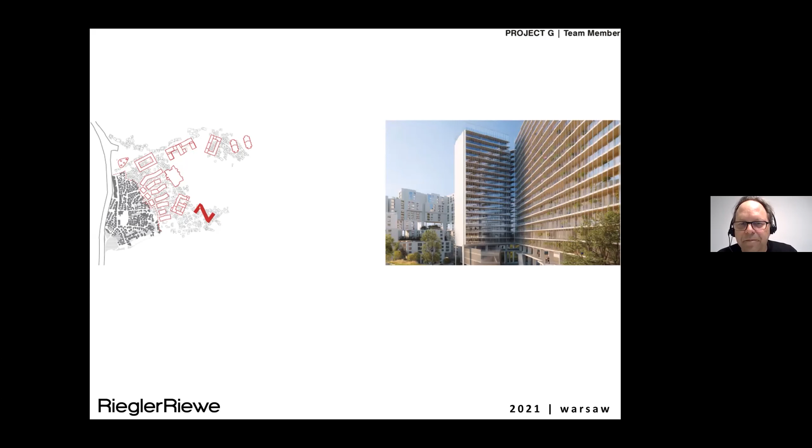For example, Lin Architects designed something like an atrium house, a project we did in this way — the floor plate was always the same, and the 18 floors were the same. We were intrigued how differently the architects would approach this project while always having the same amount of apartments. So I have 2 buildings here by Sadar+Vuga from Slovenia, terraced houses by Brandlhuber and partners from Berlin, or a big Z by Mangado from Spain. It was really fun working with all these architects in such a short time.

Then you see the whole conglomeration of buildings, very different, but with the same bottom line — that the topography is one topic here, loaded with history, and that the housing scheme itself can be very individual, but again with the same ideas, the same principles behind it.

Which is also coming back to Germany, the idea of how to actually run these big projects of vast scale, like these 13 hectares or 1,400 apartments for 3,000 to 4,000 people, where you know that you as an architect will not deliver all design services. So what we have here is, as I spoke of before, a big park in the middle. We said first create a park, but we've got a big street going through here with two bus routes going through here.

We've got two high rises. This part we are designing right now. We've got a big promenade. We've got a block over here. We've got a creche over here. It's a project we designed as well, and it's under construction at this very moment.

So it's all about a city. What is a city made of? Of course, you have to provide space for housing, for living, but you also need the space in between where you cannot really define beforehand what will happen there, but you need the space. So different kinds of utilization will be able to take place. So it's also up to the structure of the blocks, which are not really closed blocks, but open. So you can always go through a block.

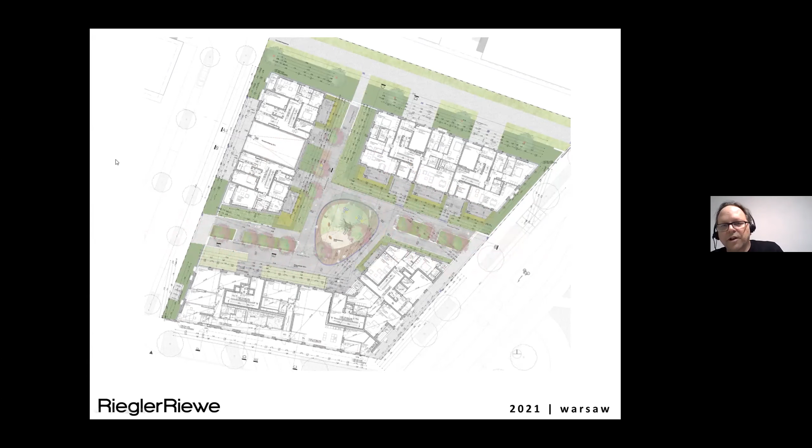And to have it in a reduced form, you say it's important just to build the mass of the city, and the rest can develop, having a ground floor along this promenade here, where these are facilities where you can have bike shops, cafes, youth centers, and so on, which are absolutely public, and the ceiling height is higher than in the floors above. So these possibilities, right up to an atelier, are possible in this part of the project, which is only dedicated to this line which I just showed.

There was an image of this corner here. So all of this ground floor area is public, of course, here as well. Then we've got the creche here. Then we've got another kindergarten here, and then the street going down here. So this is a very important point. Here we've got a supermarket inside.

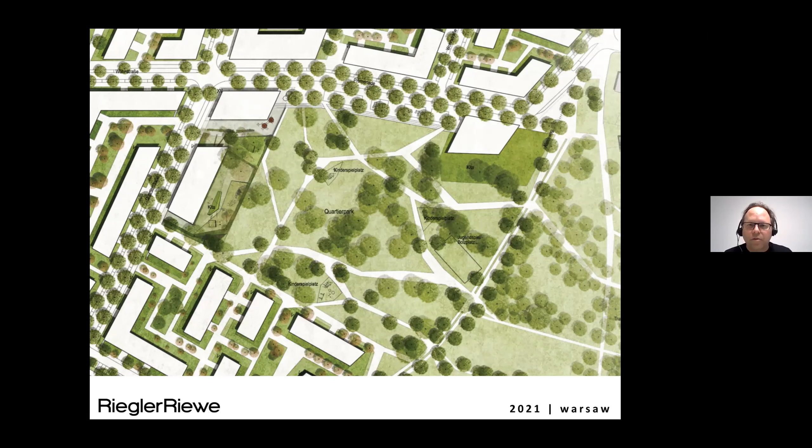And a promenade, with long discussions asking why don't we put any houses here, to make it more feasible. We said no, this is the sunny side. It's like a big lake here. So it's open, anybody can come here and walk into the park and into the nature reserve on that side. So a lot of effort had to be taken to convince the municipality and the client that this is a possibility of creating a very attractive public space, something for which we don't have any comparable examples.

So we also convinced the client to start developing the park right at the beginning, while the other projects are under construction, which they accepted, because trees take some time to grow, and also the grass pitches and so on. So this is the one high-rise building we're doing, and the housing project next to it with a kindergarten on ground floor level, so public services, which we have here.

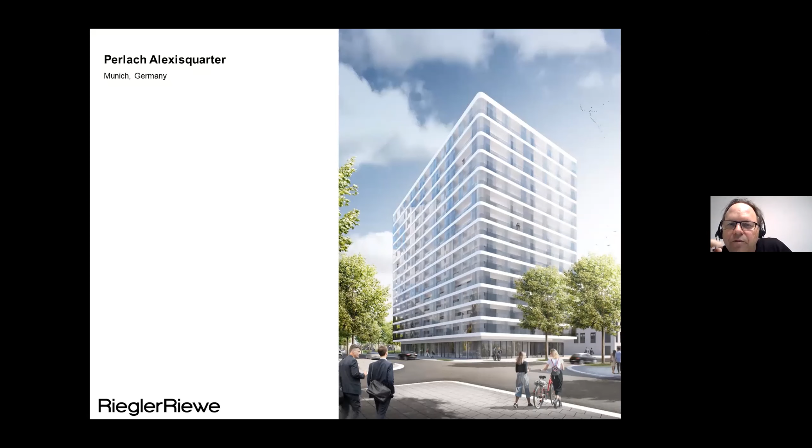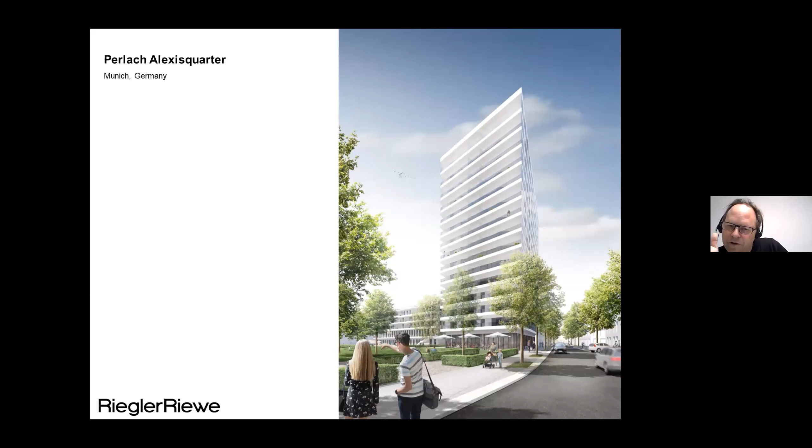And the high-rise itself on the corner, with, as we say, only two details. We've got two edges which are round edges, with the glass going round, and two edges which are acute angles, sharp edges. So it becomes a very interesting shape, and in terms of perspective, something quite intriguing alongside this promenade. And here again, the ground floor level itself is completely public.

It's very difficult to convince a client who usually just invests in housing that they can also do something else than only building apartments. Long processes, but I think we're in a very good state now.

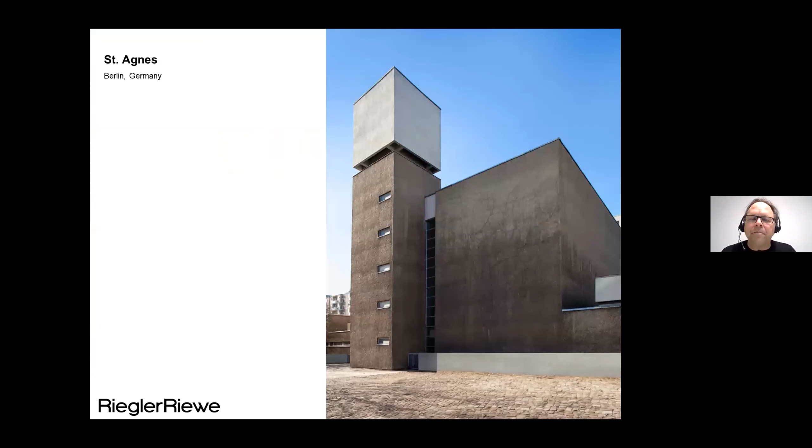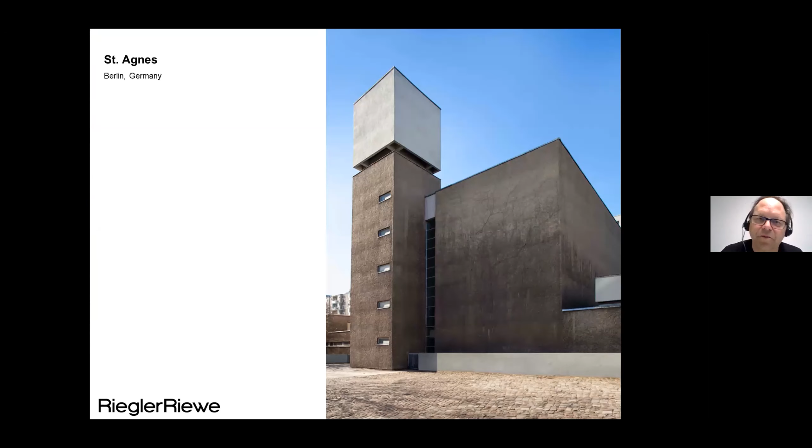And this is the church from the outside, so you don't really notice the difference from before and now. Everything is just inside. It stayed the church as it had always been. Of course, we did some amendments to repair it a little bit, it was leaking, but you don't really see the changes on the outside. This is what we really appreciate.

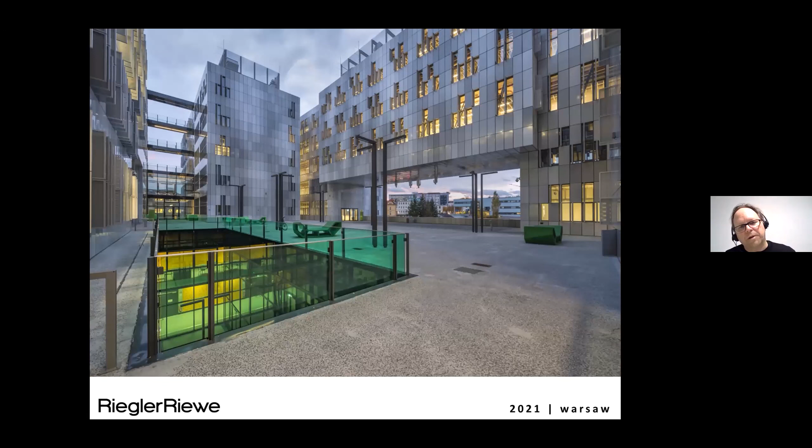Or the huge public, semi-public spaces of this university campus, which can be utilized by students, but also by the public as well, those who are actually not using the university or its facilities, except for the public space. It has changed quite a bit, although Corona has now stopped it a little bit, but it will return.

And then finally, these buildings can become a background, as we say, architecture as a background for everyday life, or in other words, we try to define structures which are open and precise at the same time, and which are like frames for the complex flow of images of utilization. Thank you very much.